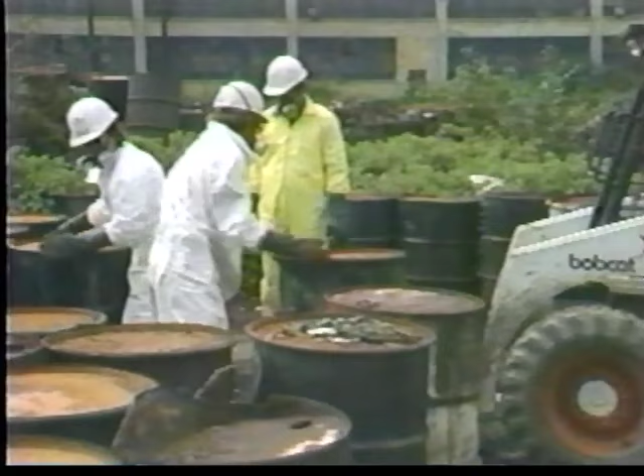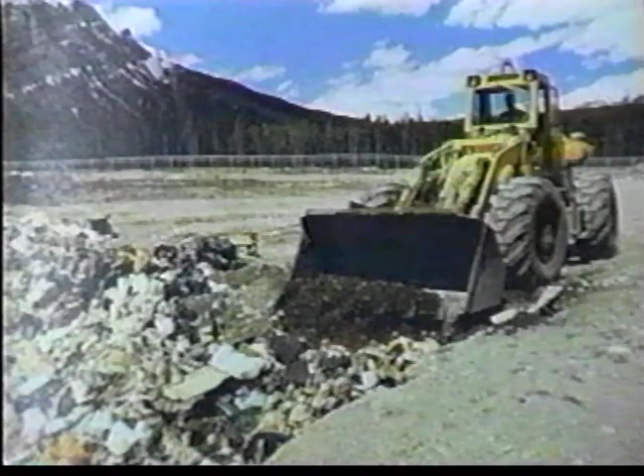You see the problem everywhere. We are drowning in hazardous waste: medical pathogens, toxic incinerator ash, bulk and hazardous chemicals, mixed toxins, weapon systems, pyrotechnics, even tires and batteries. They all become a problem once we're done with them because we have no place to safely put them. It's a major threat to the populace and to the environment, and we're making it a problem for generations to come.

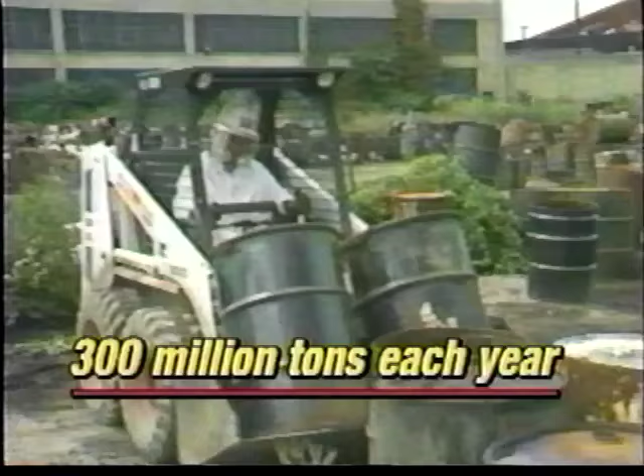In the U.S. alone, we deal with over 300 million tons of hazardous waste a year. It's a $42 billion problem in every community, in every part of the country and the world.

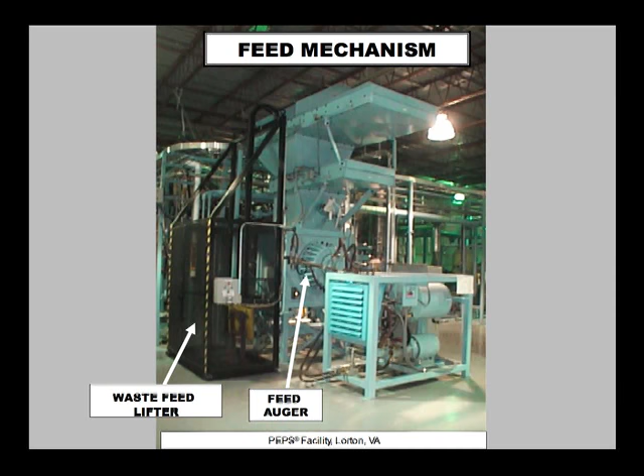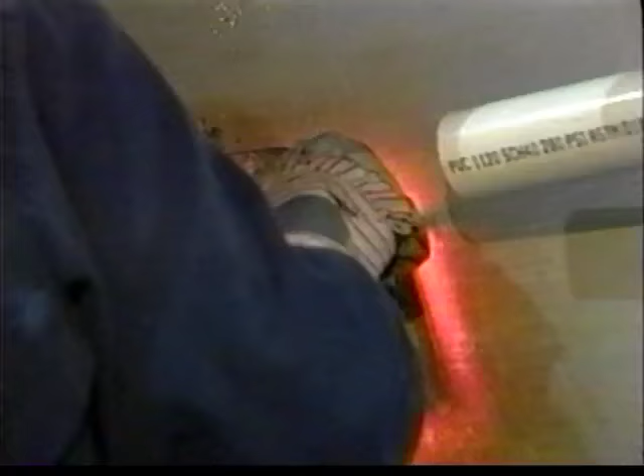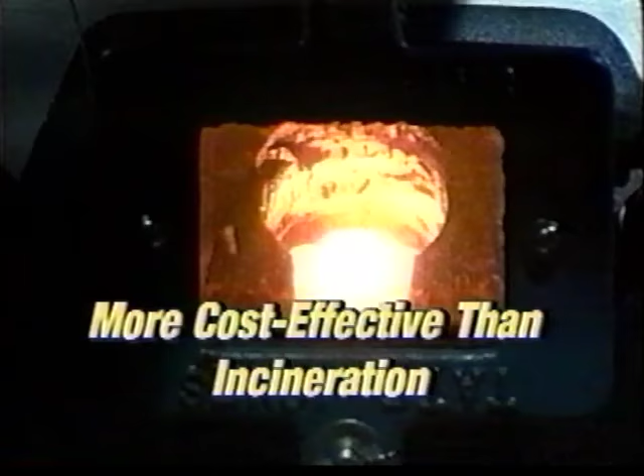But it doesn't have to be this way. Not anymore. Because now there is a genuine breakthrough in 21st century technology, a milestone innovation called the Plasma Energy Pyrolysis System, or PEPS. It may well be the last word in hazardous waste disposal, because by completely destroying waste, by reducing waste to its fundamental natural components, or converting them into useful, safe products, PEPS sets a new standard in safety and cost-effectiveness. Nothing else can match this state-of-the-art technology.

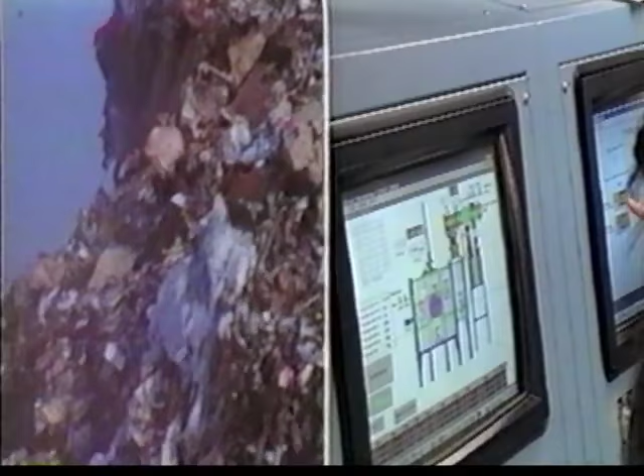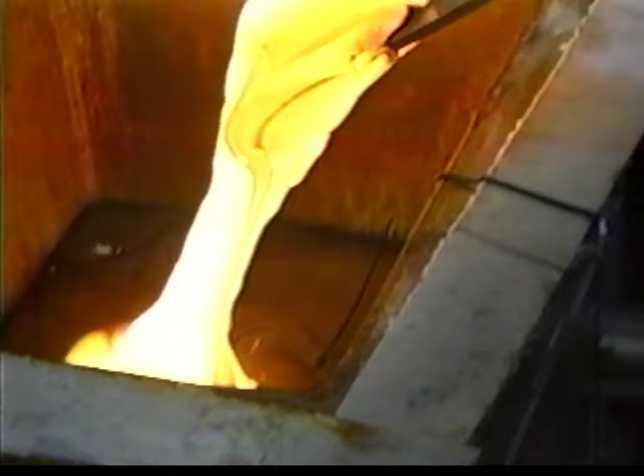With PEPS, you don't burn waste. That creates other problems. And you don't bury it. That hides the problem, for a while. Instead, you convert hazardous waste into reusable construction materials and reclaimable energy. Best of all, with PEPS, you end the soil, air, and water liability chain. The hazardous waste that now plagues us for years to come, perhaps centuries to come, is no longer there.

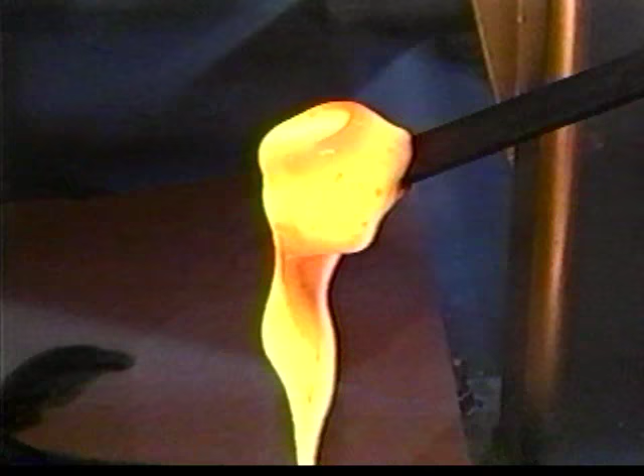It has been disassembled into its elemental parts. It has been diffused and declawed. It has been rendered harmless. We now have a process that will take all of that waste, will eliminate your liability, will eliminate the environmental risk, and will actually produce a product that's usable.

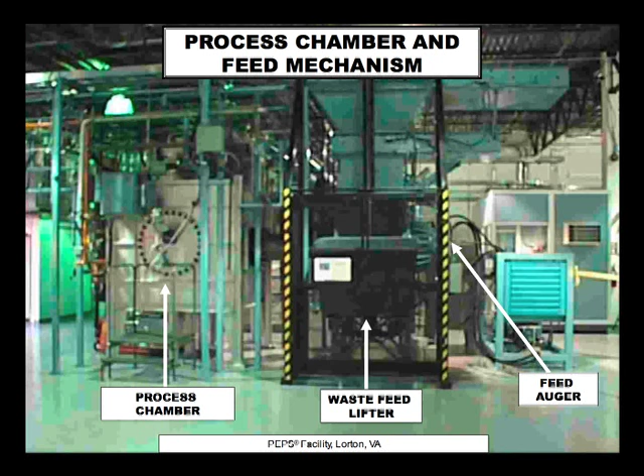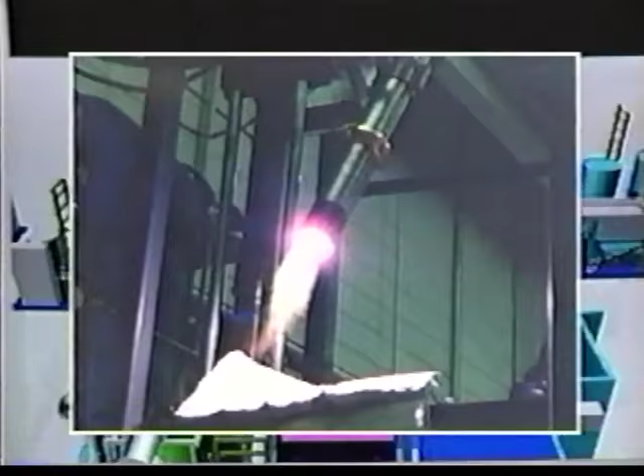The PEPS system is a commercially viable process building on technology which came out of NASA research. The key to it is a 500 kilowatt plasma arc torch, which essentially creates and sustains a bolt of lightning. The torch operates inside a sealed, airtight container and produces temperatures at up to 21,000 degrees Fahrenheit.

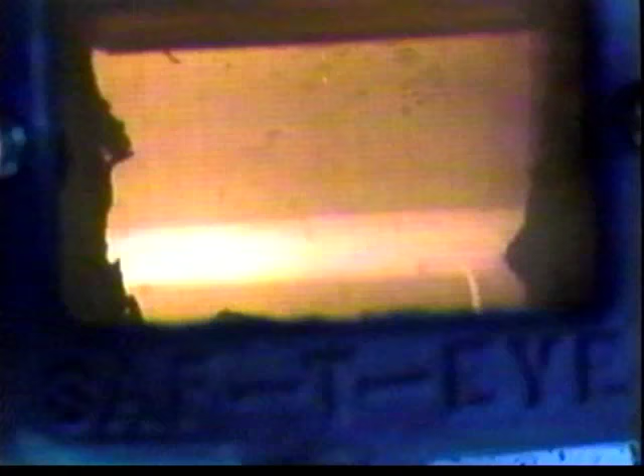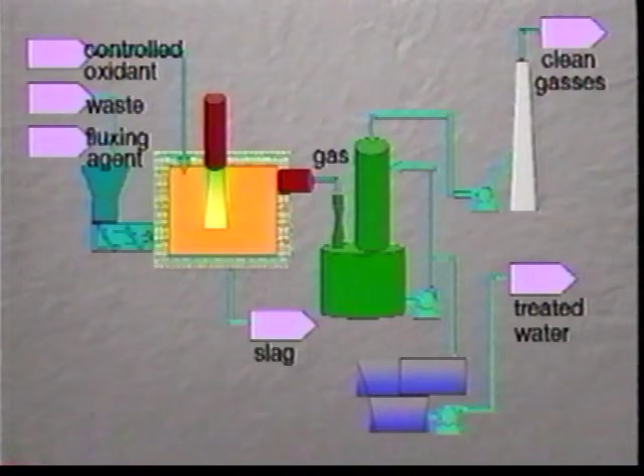There is no oxidation here. There is no burning. Organic materials are quickly broken down into their component elements in the form of hydrogen-rich gases. Inorganics, like metals, are fused into a glassy, rock-like slag. They are not simply encapsulated in the slag. They are bonded there, vitrified in a form that is forever inert and forever safe.

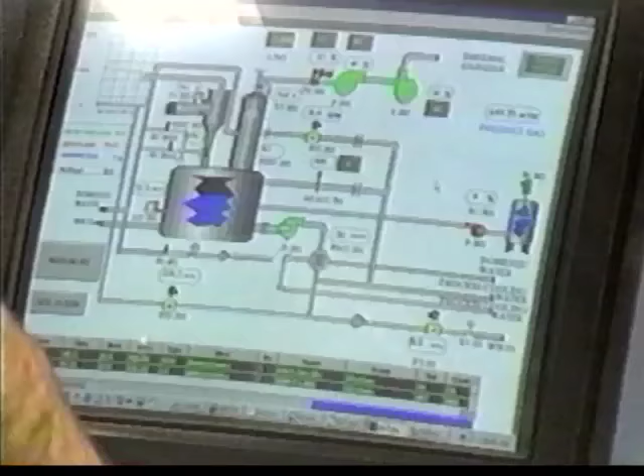Gases are continuously drawn off and quick quenched to prevent formation of dioxins or furans. The gases are then cleaned to remove any remaining particulate matter. They can be used at this point like any other syngas to generate electricity, with every ton of waste netting up to 900 kilowatt-hours of reclaimed energy.

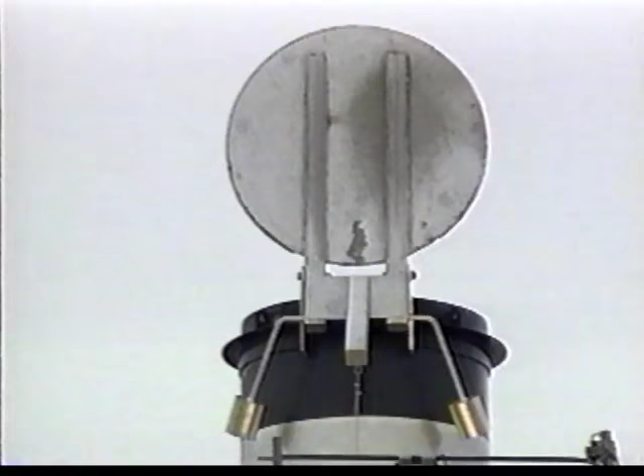Alternatively, gases can be further processed into water vapor and harmless dischargeable carbon dioxide. In any event, there is no visible plume or flame with PEPS, and air emissions have been proven by independent laboratory analysis to be far below allowed EPA limits. Water used to cool the system is likewise conditioned and treated at several stages. Most of the cooling water is recycled, with the balance safe enough for the local sanitary sewers.

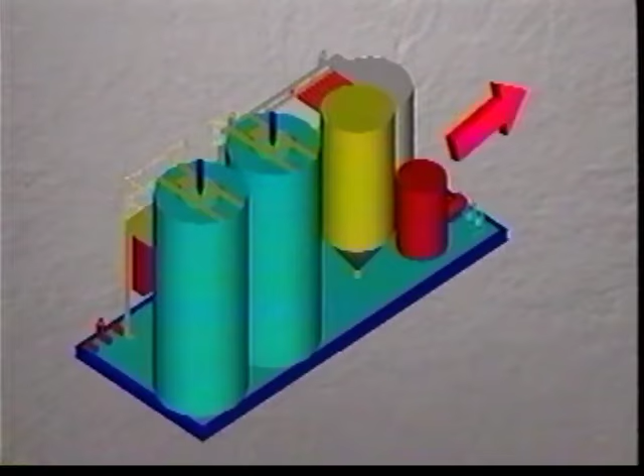All of this activity is safely monitored via remote cameras and sensors. Instrumentation monitors and logs all activity within the facility. The fully automated control system ensures efficient and safe operation.

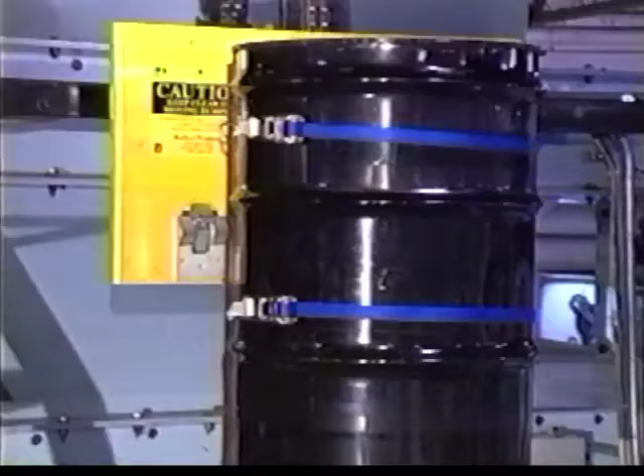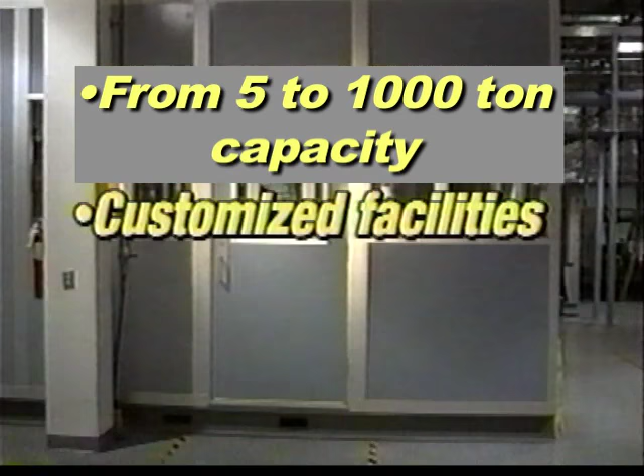The demonstration system built for the Army in Lorton, Virginia can handle up to 10 tons of hazardous waste a day. But plants can also be built to consume as much as 1000 tons a day. This is one of the most exciting features of the PEPS technology. A facility can be customized to virtually any hazardous waste disposal situation. Regardless, waste does not have to be sorted or separated. And because it is so compact a technology, PEPS facilities can even be made transportable to be moved wherever they may be needed in an emergency.

It's exciting. It is the kind of process that should be definitive of the 21st century. A win-win, we can not only deal with environmental pollution, the hazardous medical, toxic, chemical waste, but we can produce productive byproducts of it.

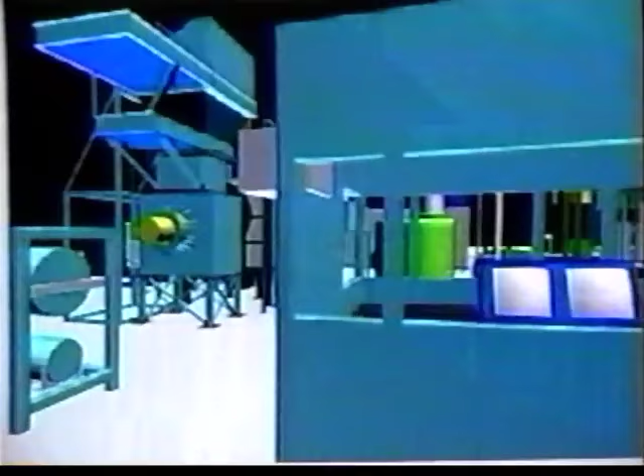You can see then why the PEPS technology is clearly the wave of the future. It's the perfect solution for hospitals, industrial plants, municipalities, and waste hauling companies, as well as DOD and DOE sites. In fact, the PEPS technology has already been fully permitted in Alabama, Virginia, California, and Washington State.

It's absolutely unique. There is no incineration, nor are there any releases that are harmful to either people or the environment. With PEPS, your liability ends here. That's because PEPS does not reduce or encapsulate or reform the hazardous waste. With PEPS, hazardous waste is destroyed.